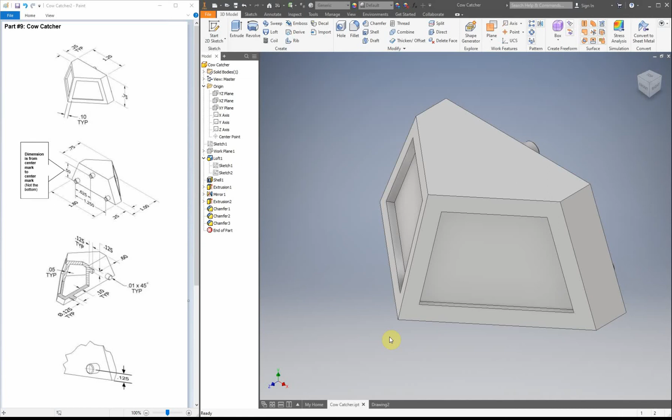This video is going to be for our cow catcher work drawing. Right now I have a work drawing already open, but it's size D. For this part, it's going to make a lot more sense to have it on size C paper. So I'm going to right click on sheet 1, edit sheet, and switch to C.

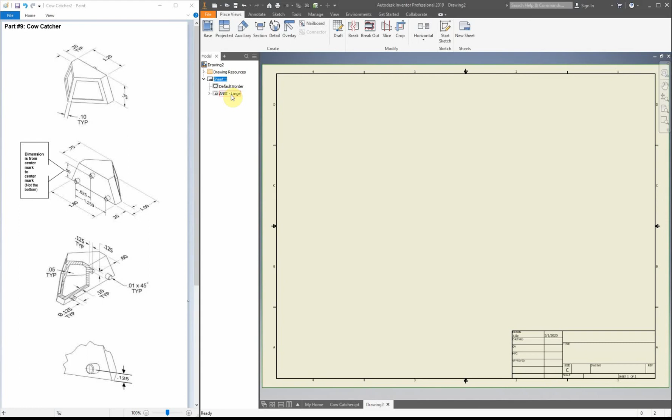I do not need to change my title block size because large is for everything except for size A. So I'm going to go to base, and since this is way too tiny for this page, I'm going to make it bigger and do 2:1.

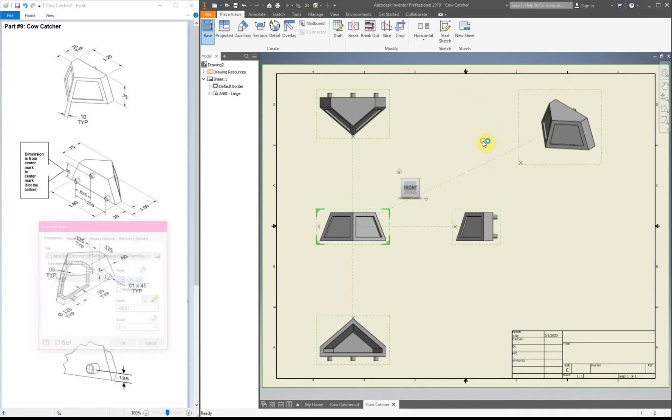So I'm going to place my front view right here, my top view, bottom view, right view, isometric, click OK, and then we are not done. We're going to click on projected, click on the right side, bringing it back. Right click, create. Still have some more to go.

So now we're going to do an auxiliary view. This one's new, and you may or may not have remembered this from our lesson, but this is for putting dimensions on a surface that is not flat on the paper. Because we have these lovely little cutouts, and they are not flat, they are on a slanted surface right here, we need to put in an auxiliary view.

So we're going to click on our bottom view, click on this edge right here, and before you click to place it, you're going to need to make sure you click this lovely little checkbox. The reason for that checkbox is this right here. This is our cutting plane line, or in this case it tells us where this view came from.

Next we're going to do a section view on our right side. We're going to make sure this is right in the center, right across, right click, continue. I'm going to bring mine down. Okay, so that now shows us the inside, so we have the wall thickness right here and right here.

The next two views are ones that are helpful. Some of you may like them, some of you might not like them. So what I'm going to do is click on my back view over here, and I'm going to click kind of around this spot and off to the side. That gives us a much better view of this part right here because it's very tiny on the screen right now.

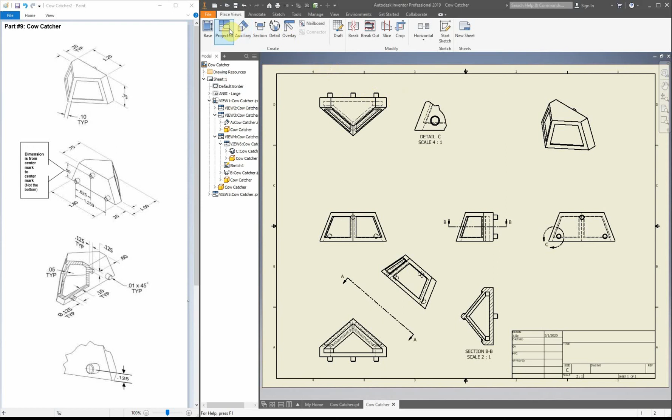Our next one is another detail view, and that is going to be of our peg but in a different direction. So I'm going to use this one right here and place it here. No, I don't like that. I like them a little bit more level to each other. Some of you might be a little bit more picky or less picky.

So I'm going to now double click on my isometric, click on my blue sphere right here, and click OK. Keep wanting to call it a cylinder. In the last version it was a cylinder.

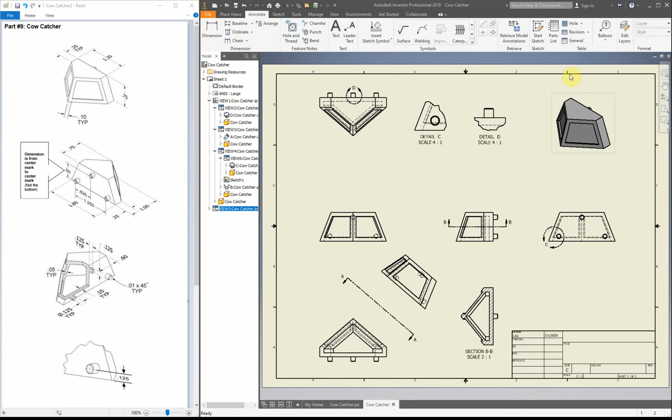Alright, now I'm going to go to annotate, and you may or may not have heard my cat fall over. Oh no, she's getting into a mess. Is she chirping? Apparently my cat is chirping.

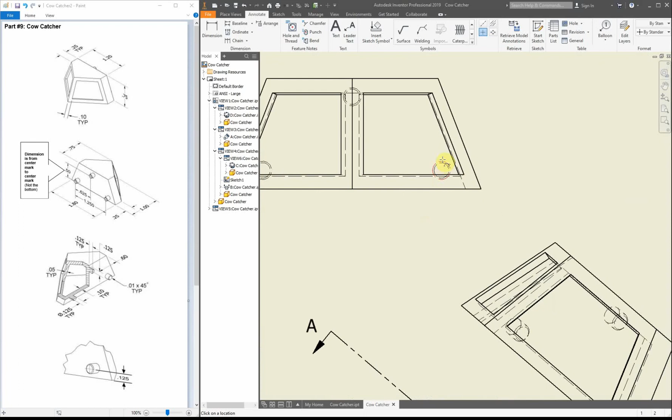Okay, so we have our center marks to place in. We only have a few places to place these in. And you're not going to put them over here because it's just going to make everything a giant mess.

Next we're going to put in our center marks. Or sorry, our center lines. We just did the center marks. For this one, I like to use a centerline bisector. I just find it a lot easier than trying to line everything up nicely and much, much faster.

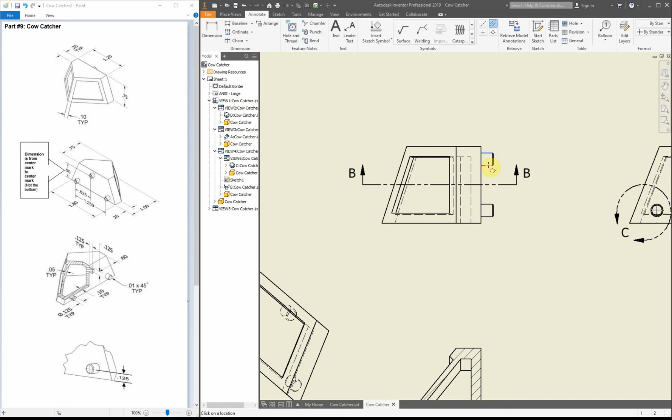Alright, let's see, still a few more. There are a lot of these. This will take you a little bit of time. But again, I like to put these in before all the dimensions so that I can actually see where all of these are coming from. And hopefully you're better at zooming than I am.

Alright, and we're going to use chamfer, because this is one you may or may not remember from one of the other videos. So again, for this one, we're clicking on this edge, then this one.

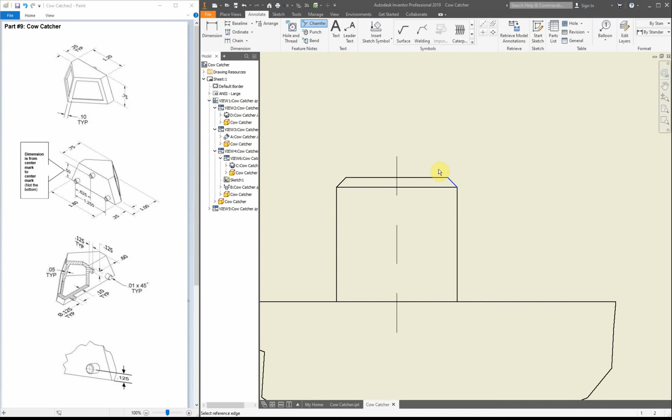Okay, so I know it's kind of thrown off the screen there. So because we have 3 of these, I'm going to add in TYP for typical.

So this is kind of the opposite of how we placed it in originally, because last time to place them in, we click on the face and then the edge, but to put in the dimension, you do edge, then face. So just the reverse.

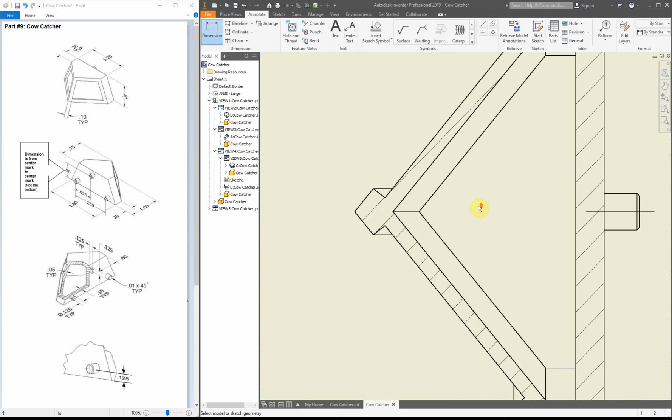Alright, so anything else? Oh, for dimensioning, for something like this, when you place this in, you're going to make sure this dimension is on the outside of your part, not the inside. So if it happens to be on the inside, you're just going to click on your dimension and move it. So easy as that. And again, because I have two of these and they are identical, TYP.

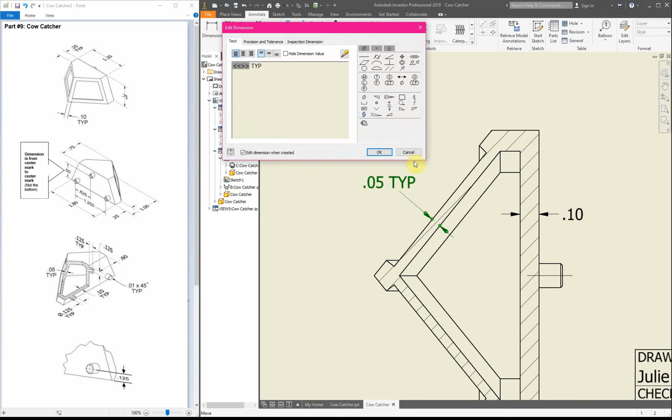Alright, and another one that some students kind of mess up on a little bit is this one right here. So if you zoom in, you can see that there's actually two lines. You want this line, and then, I know my number's in the way, this one. And I'm going to move it down here.

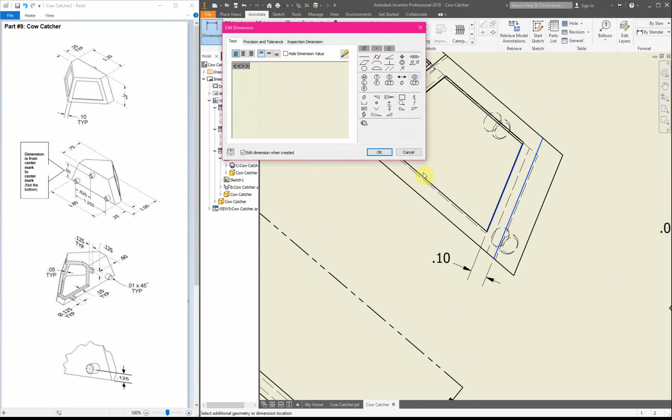Alright, and since we have all these sides that are the same and the other side right here is the same, we can add in TYP. And click OK.

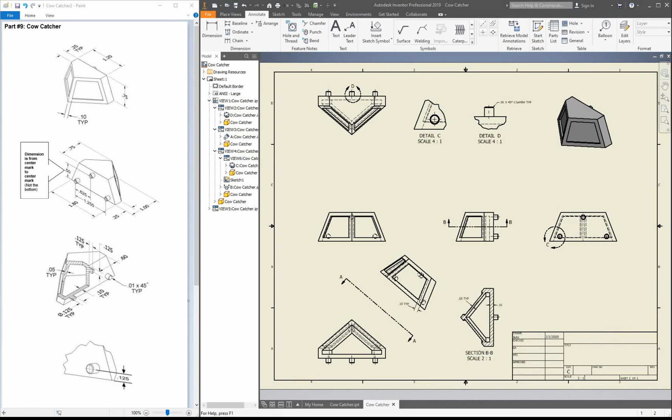Alright, so that kind of gives you just a quick start of what you need to do. There are still a lot more dimensions you need to place in. You still need to fill in the title block. And again, for the title, you just put the title of the part. In the box above, just make sure you put your name and then what class you're in. And then after that, don't forget to finish adding all your dimensions, turn it into a PDF at the end, and then make sure you submit.